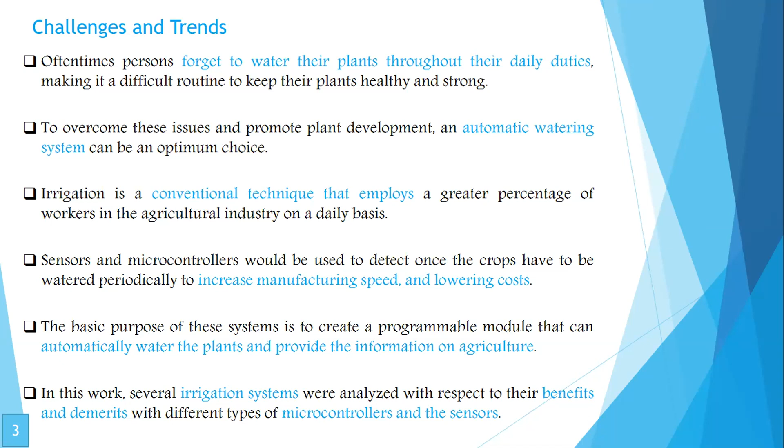The basic purpose of the system is to create a programmable module that can automatically water the plant and provide information on the agriculture or any other environment. In this work, we analyze different kinds of irrigation systems with respect to their benefits and demerits, based on different microcontrollers and sensors that can make the cost higher or the design more complex. That's why I'm going to focus on systems based on Internet of Things.

Often we call it Internet of Everything, a paradigm that invents a worldwide network of interconnected equipment and gadgets. In such a situation, we call it smart gardening based on IoT, or smart farming — the process of remotely serving the status of the farm or garden and automating it. Gardening is a pleasurable hobby that needs attention to keep plants healthy and strong.

Due to the constant changeover in weather and climate, it's impossible to maintain constant observation all day. This makes current real-world mechanisms need to be equipped with brains and processing power in order to develop the plant or system correctly.

The shortage of water is considered a major problem in today's fast-paced world. That's why we thought that a watering automation system based on IoT aims to connect as many devices as possible over the internet. There are many different factors we have to think about when designing a control system that can automate gardens or smart farming.

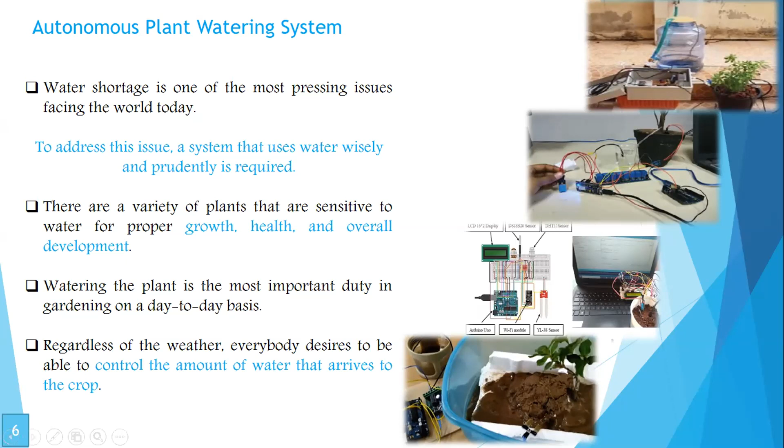Regardless of the weather, we know that everybody would like to be able to control the amount of water that arrives to their plants and crops. Here I'm going to show a summary of the presented works.

Actually, all the works given are using sensors similar to each other: soil moisture sensor, DHT which is temperature and humidity, pH sensor, and so on. However, the differentiation will be in the microcontrollers.

We know that there are different kinds of modern microcontrollers nowadays, like Raspberry Pi and Arduino. However, with Raspberry Pi we can deal with complexity in the coding part, and for Arduino it's a perfect board.

But we have to think about making an integration with other kits, for example with Zigbee or the Ethernet shield, in order to create the Internet of Things and make it effective.

So we think always about Node MCU, which is a kind of Arduino integrated with ESP8266, which already has Wi-Fi integrated, so we can deal with IoT similarly.

However, the biggest problem in such integration is that the number of analog ports is limited. So some authors are making integration with Node MCU and Arduino, which makes the cost and complexity higher.

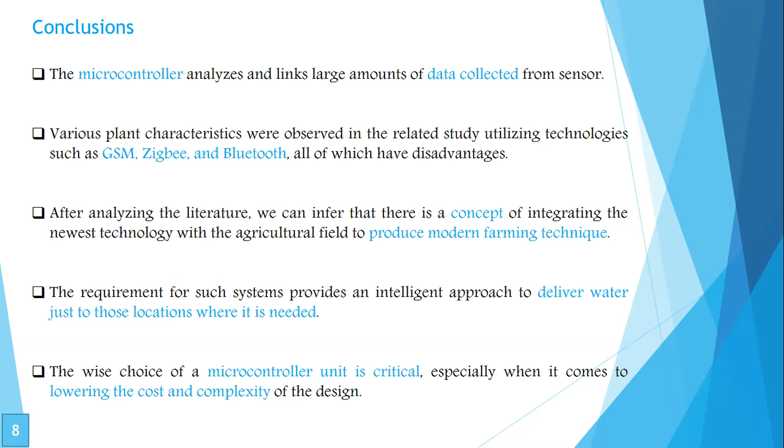As I said, when we choose an Arduino with Node MCU together, we get some complexity and higher cost. So we have to choose the microcontroller in a better way to reduce the complexity and the cost.

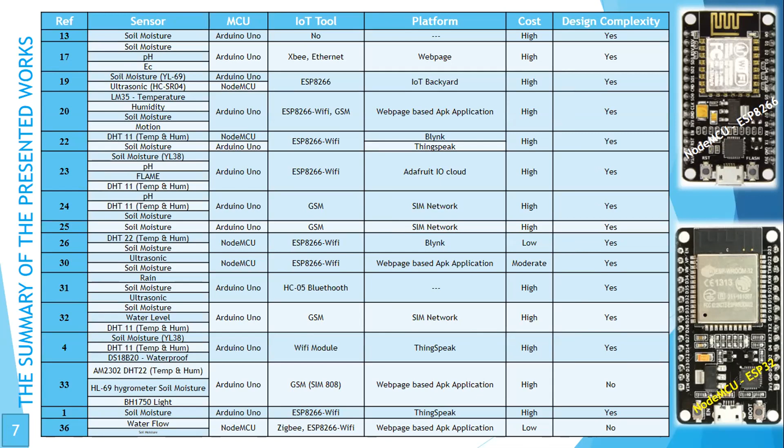Okay, let me share my screen first. Sorry, okay, so can you see my screen, everyone? Yes, okay, thank you.

Okay, Assalamualaikum and very good morning. I think in Turkey it's morning, right? So I'm in Malaysia, we are actually in the afternoon, in the evening. So I'm here today to present this work.

The topic is development of quadrotor control under wind disturbance. I'm Ilya Muhammad Noor. This research is teamwork of myself and my final year project student, Nurul Ain Humaira Hasnul Hadi, and also my research grant team.

Basically, the work here is focusing on UAV, unmanned aerial vehicle, and we are focusing on quadrotor UAV. So what is a quadrotor UAV? Basically, there are two types of UAV, which are fixed wing and vertical takeoff and landing vehicle. So quadrotor is one of the VTOL families, which is vertical takeoff and landing.

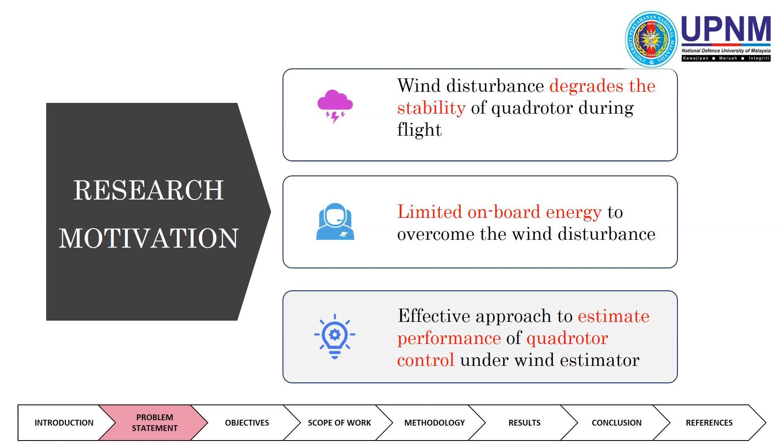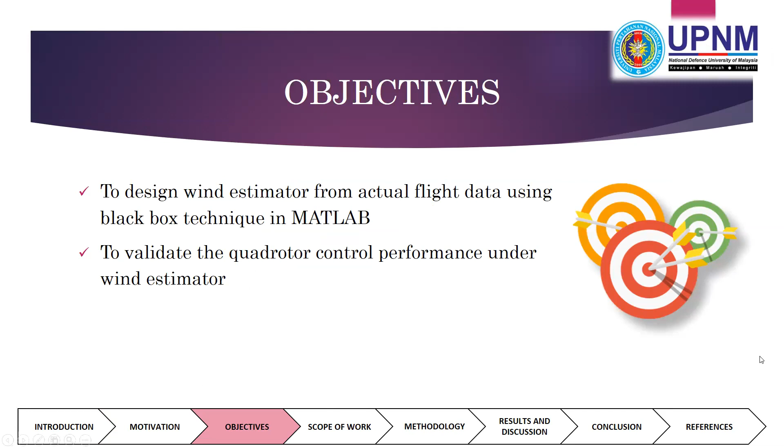In this project, we are using actual flight data obtained from an experimental setup, where we have an actual quadrotor flying, and it experiences turbulence wind that we create from a wind tunnel.

Based on this result, we designed a flight procedure where the flight environment data we collected focuses on two flight environments: moderate wind and strong wind. The quadrotor here is hovering, starting from 0, taking off and hovering at 2 meters above the ground.

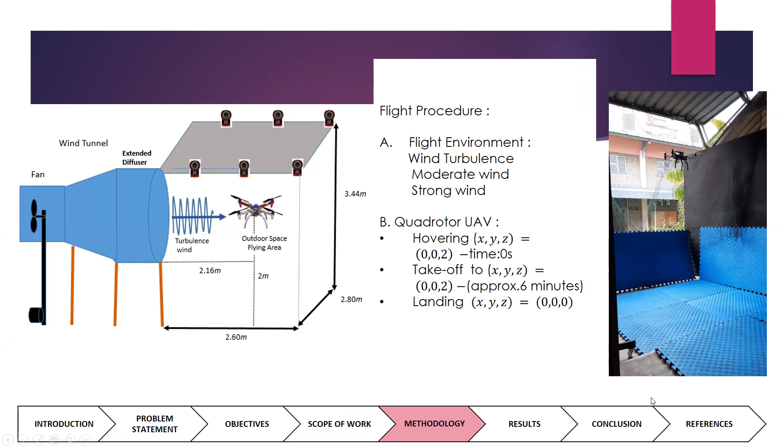Details about this flight data and setup can be found in my paper on the evaluation of quadrotor flight and battery consumption under wind turbulence condition in an open jet wind tunnel, which was published in 2021.

For this work, based on the actual flight data we obtained, we are designing a wind estimator using a black box, which is a transfer function in MATLAB. This is the framework for the development of the wind estimator.

Based on the actual flight data, we follow the normal procedure: data identification and then data processing, and we divide the data into two parts, estimation data and validation data. The estimation data is inserted into the black box toolbox in MATLAB, and then we validate the model by comparing it with the validation data and analyzing the performance.

Let's see the results. This is the result from the actual data. In this presentation, I'm focusing on the results for position Y, where the quadrotor data shows two conditions: moderate wind and strong wind.

The quadrotor's flight under moderate wind is shown in blue, and the flight under strong wind is shown in red. This is position Y. As you can see, during operation under moderate wind, at takeoff the position error is 0.000447, and during landing, the position should be at 0, but it has an error of 0.015.

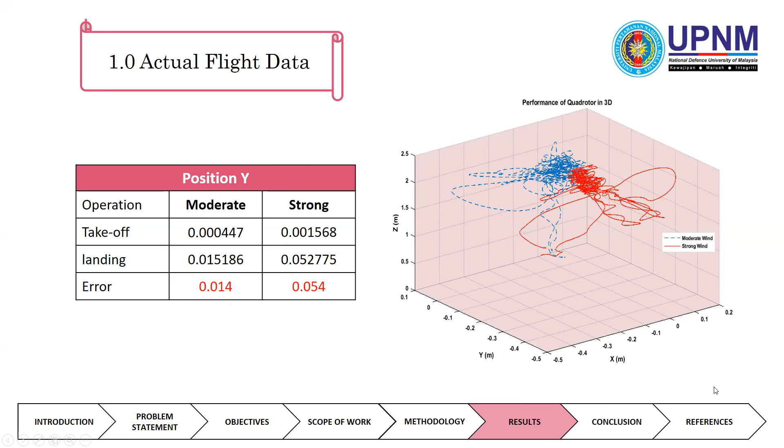This one represents the actual flight data. You can see here the actual flight data from the wind tunnel in terms of three-dimensional X, Y, Z position. So this is what it means here, the position error of 0.014.

We look at it, it's supposed to be the UAV, the quadrotor supposed to be hovering at the desired point, which is 0, but it is shifted an average of 0.014 here due to the moderate wind, and this one is shifted at 0.054 due to the strong wind. So the strong wind experiences higher deviation in position Y compared to the moderate wind.

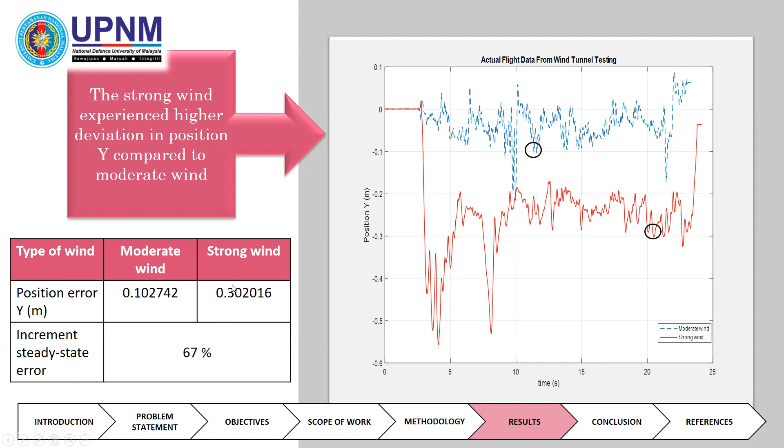So if you can see here, the increment of the steady state error between the moderate wind and the strong wind is 67%. It means that strong wind has 67% higher position error compared to the moderate wind.

So again we look at the actual flight data for position Y with how the control loop performs during this position control. The blue one is the moderate wind, and the second graph is the torque, showing the torque for the moderate wind and also for the strong wind that controls the four rotors of the quadrotor, so that the quadrotor UAV is able to position at the desired position.

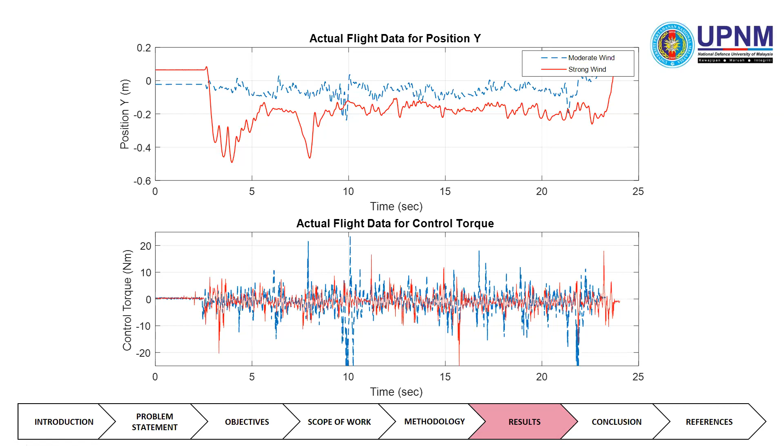This is the simulation for the model. You can see here the model of the quadrotor that we use in MATLAB to study and analyze the performance of our developed wind estimator with the actual flight data. This is the moderate wind and the strong wind transfer functions that we developed in the design stage.

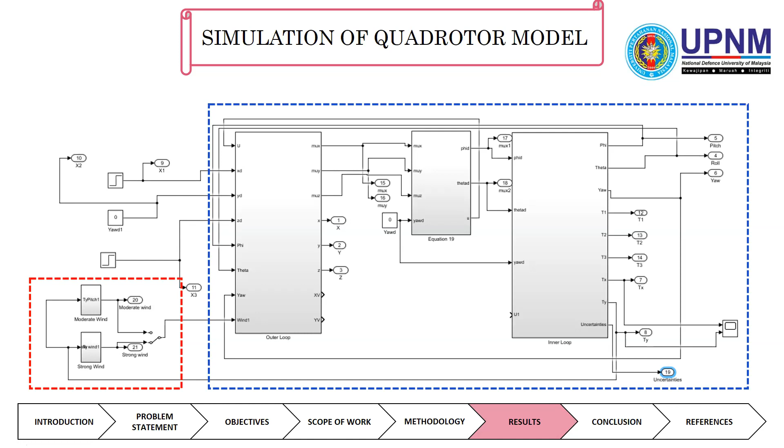Now we go to the simulation of the quadrotor with the wind estimator. If you can see here, this is position Y over time for the simulation. This is the time from 0 to 1000 seconds, so we hardly see anything, but there is actually something around here.

So we zoom it to this range, from 50 to 500 time, and then we zoom in on position Y. You can see that the strong wind gives a higher, larger overshoot using the transfer function of the strong wind, with some flight data input. It shows that the output from the transfer function using strong wind gives the highest overshoot, a large overshoot, and larger steady state error compared to the moderate wind.

From the results, we did a few studies. We performed this analysis using other flight data just to strengthen the results. So in the end, this is what we get.

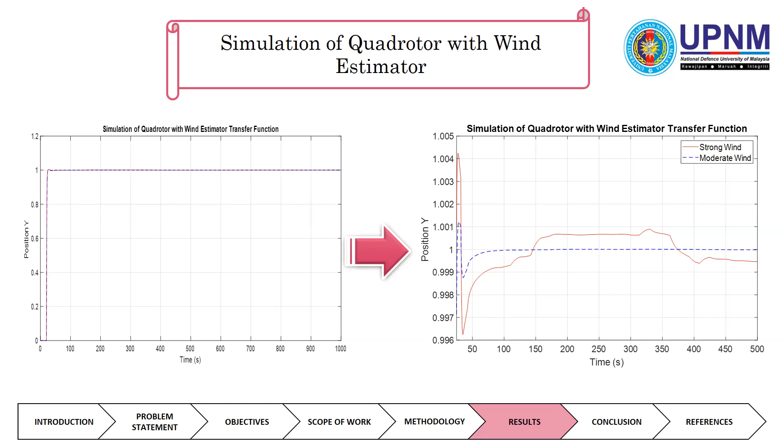From the type of wind, using the actual flight data, as we mentioned previously, we have a 67% increment of position error for the strong wind compared to the moderate wind. It means that when the wind is strong, the position error for the quadrotor UAV experiences 67% higher deviation compared to the moderate wind.

When we did the development of the wind estimator using a transfer function in MATLAB, MATLAB toolbox, using black box techniques, we discovered that we obtained the steady state error for the moderate wind around 0.99, and the strong wind around this value.

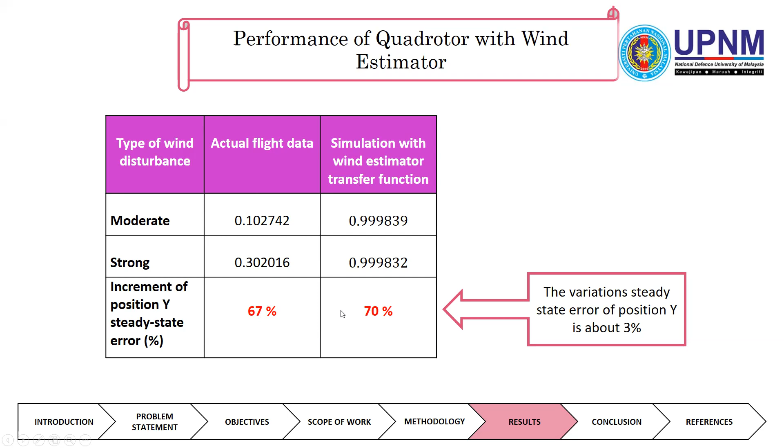And if we compare the relationship between both, we find that strong wind has 70% higher steady state error compared to moderate wind, using the model that we estimated using black box techniques. So we can conclude that the variation of the steady state error of position Y between the actual flight data and...

...the wind estimator that we developed is just about 3%, which we find acceptable. As a conclusion, the development of quadrotor control under wind disturbance can be achieved by simulation of quadrotor using wind estimator. Thank you.

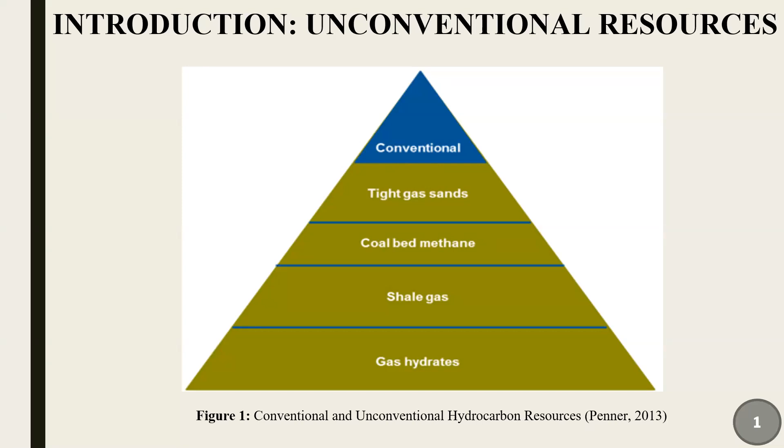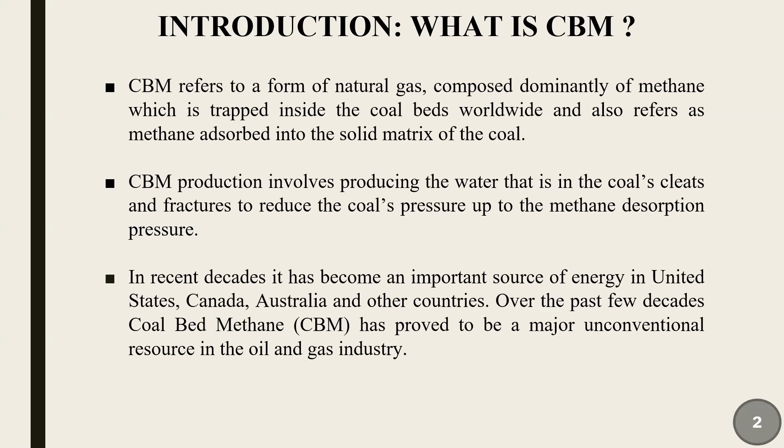What is CBM? Coal bed methane is an unconventional form of natural gas found in coal deposits or coal seams. In recent decades it has become an important contributor to energy production, mostly in countries like the United States and Australia. China is catching up, where the majority of the country's natural gas comes from coal seams. Coal bed methane production involves producing the water in the coal cleats and fractures to reduce the coal pressure down to the methane desorption pressure. This allows desorption of methane gas from the coal micropores and cleat surfaces so it can be produced.

What is enhanced coal bed methane? It is the injection of gas, either carbon dioxide or nitrogen, into the coal seam. This helps produce more methane gas that would otherwise be inaccessible. This unconventional method, which also serves as a method of carbon sequestration, involves injecting liquefied gas like CO2 or nitrogen into the coal, which is preferentially adsorbed by the coal. Because of this preferential adsorption, rather than depressurizing the reservoir to allow methane desorption, methane gas is released as CO2 or nitrogen is injected, acting as a kind of exchange between them. Normally, coal bed methane produces up to about 50% of the available methane from a coal seam, while injection of CO2 or nitrogen gas increases this production to about 90%.

That is to say, for example, if you have a Coca-Cola bottle with liquid inside, and you shake it and open it, it rushes out, and with time the pressure declines. But let's use Mentos as our gas, either CO2 or nitrogen, and throw it in there - the pressure will increase, and it will sweep out the remaining Coke, the remaining liquid in the bottle. So that is to say, it increases the production.

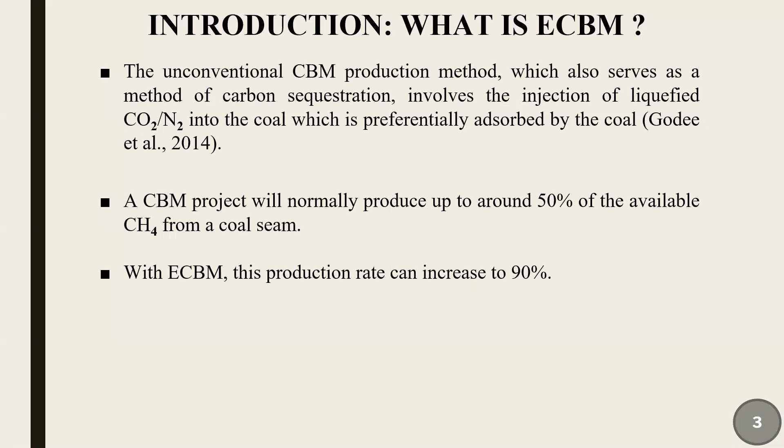So, carbon sequestration: carbon sequestration secures carbon dioxide to prevent it from entering the earth's atmosphere. Although carbon sequestration can occur naturally, this process is slow, and geological sequestration is needed to effectively reduce carbon footprint. Using carbon dioxide as an injection gas is apparently a win-win situation, as more methane gas can be produced while CO2 is stored underground.

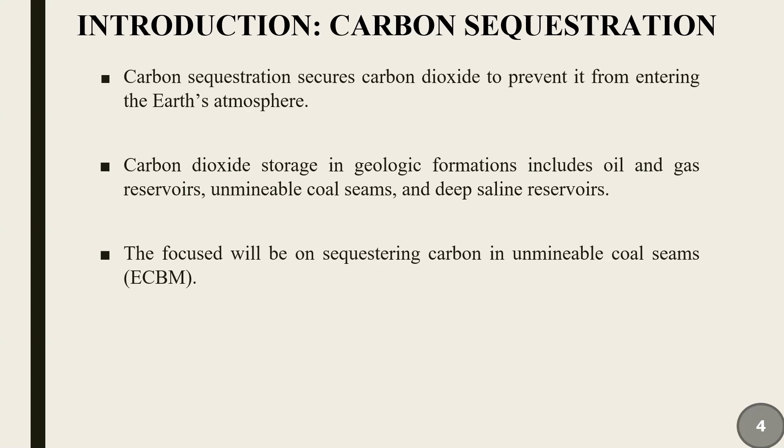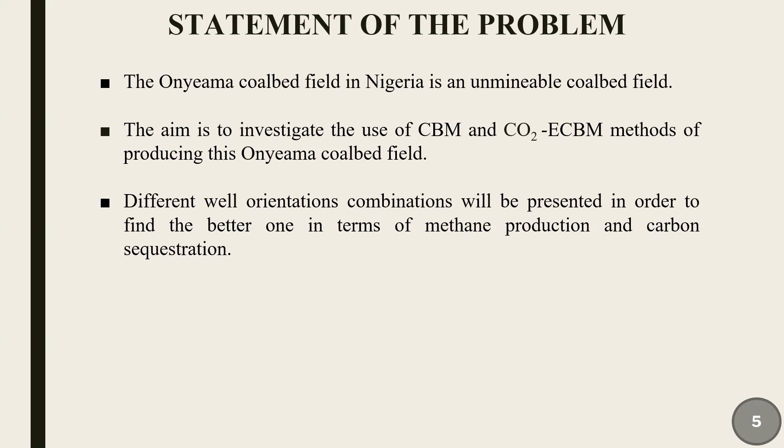Statement of our problem: the Onyeama coalbed field in Enugu, Nigeria, is an unmineable coal field. We use this as our case study to investigate the use of coal bed methane and CO2 enhanced coal bed methane methods of production in this field. Different well orientations were presented to find which performs best in terms of carbon sequestration and methane production.

Methodology of this Onyeama coal bed field: the Onyeama coal bed field in Enugu is unminable coal, as I said. The characteristics of the field will be shown in the next slide.

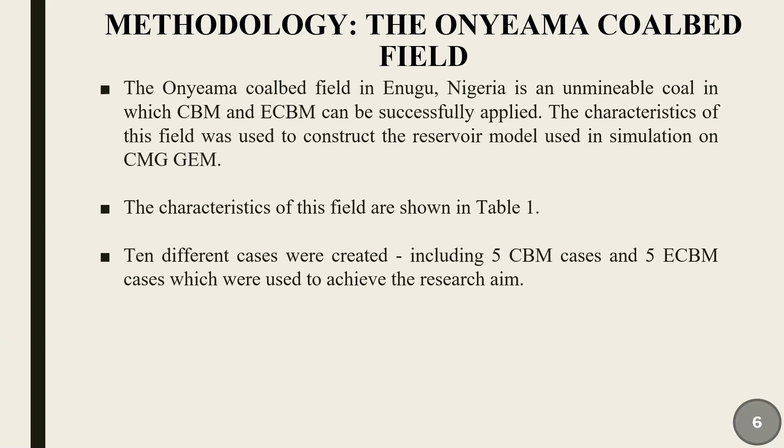10 different cases were used to create this model on CMG GEM, which include 5 coal bed methane and 5 enhanced coal bed methane cases. The created models were then run on CMG GEM for 10 to 15 years, starting from the 1st of January 2020 for production and injection until reaching economic limit.

After the economic limit was reached, injection was continued for enhanced coal bed methane cases for 10 more years. Other than the first case, which was run for 15 years, all other coal bed methane cases were run for 10 years before reaching their economic limit, at which point production was stopped.

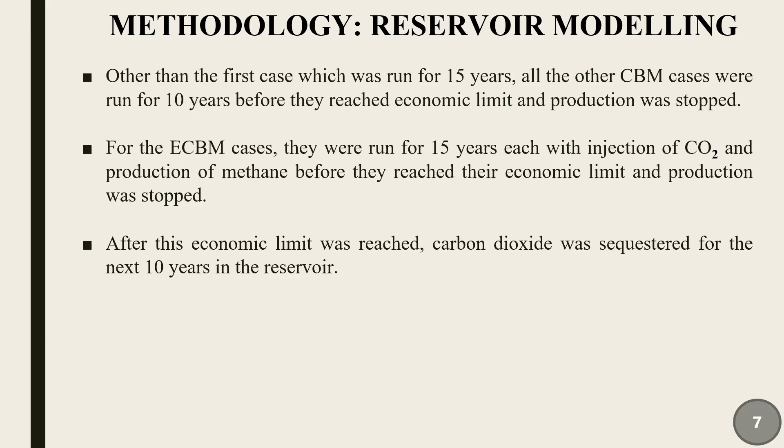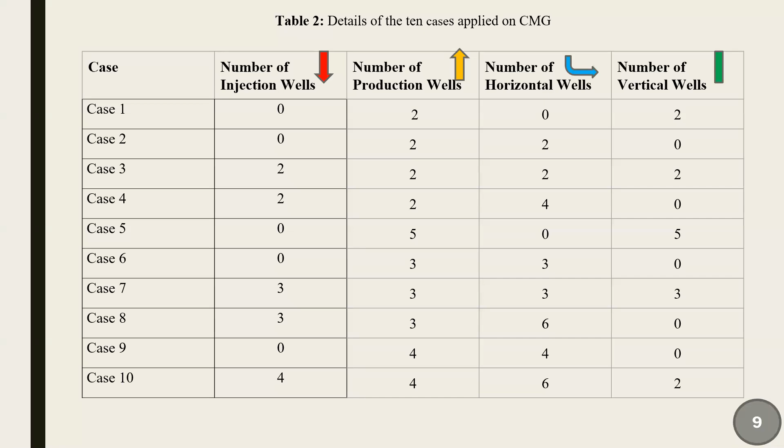Case 6: 3 horizontal producers. Case 7: 3 horizontal producers and 3 vertical injectors. Case 8: 3 horizontal producers and 3 horizontal injectors. Case 9: 4 horizontal producers. Case 10: 2 vertical injectors, 2 horizontal injectors, and 4 horizontal producers. So these are the details of the 10 cases applied on CMG GEM.

The results of coal bed methane recovery operations are dependent on the adsorption and desorption of methane. This desorption and adsorption of methane to coal is determined by the Langmuir isotherm, in which the amount of gas at pressure equals the Langmuir volume parameter over the Langmuir pressure parameter plus pressure.

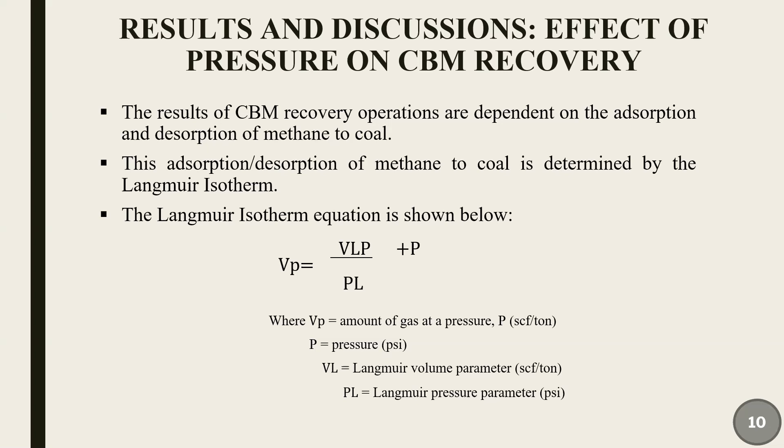So to investigate this scenario, three cases were considered. Case 3 was subjected to 3 different conditions: high pressure at 2000 psi, medium pressure at 800 psi, and 36.26 psi as low pressure.

It is important to note that case 3 was originally investigated at low pressure, that is 36.26 psi. The pressure conditions were set in the reservoir by setting the constraint of the producers to have minimum pressure equal to the desired pressure condition.

Running these simulations revealed that the relationship between pressure and volume of adsorbed gas is directly proportional. That is, at lower pressure, there is a low amount of gas adsorbed to the coal, and vice versa. This is in agreement with the Langmuir isotherm equation.

This means that the lower the pressure in the coal bed methane reservoir, the more methane can be desorbed from the coal and produced. At higher pressure, however, there is a high limitation on the amount of methane that can be desorbed from the coal.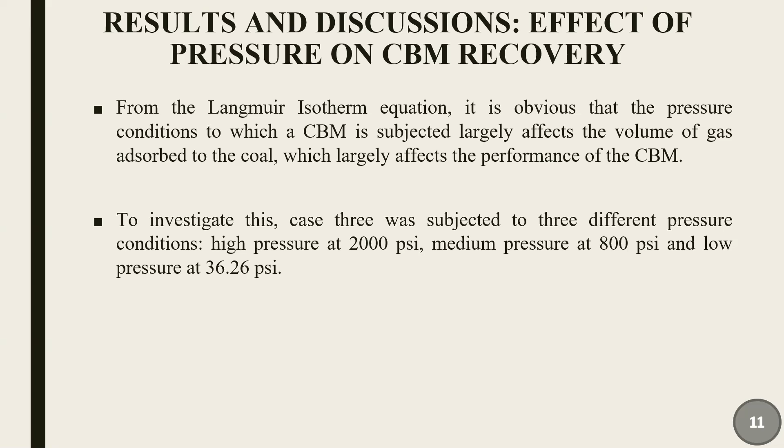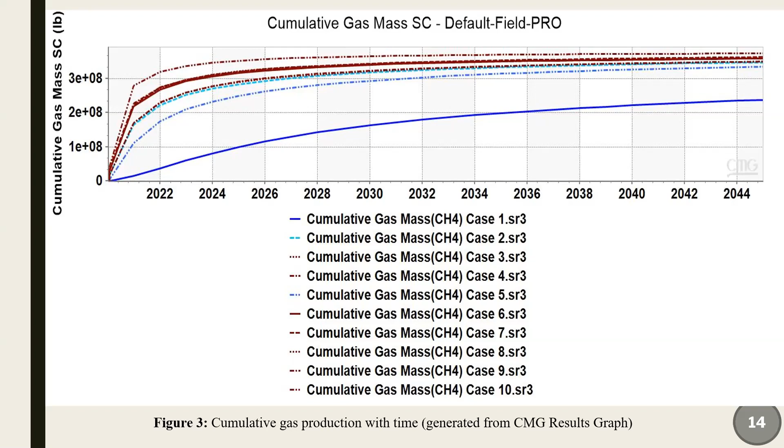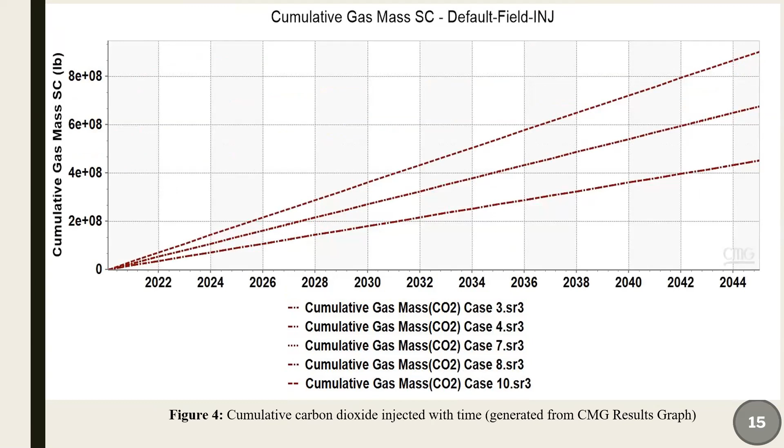This is the cumulative gas production with time for all 10 cases. This is the graph generated from CMG, and this is the cumulative carbon dioxide injected with time, also generated from our CMG graph.

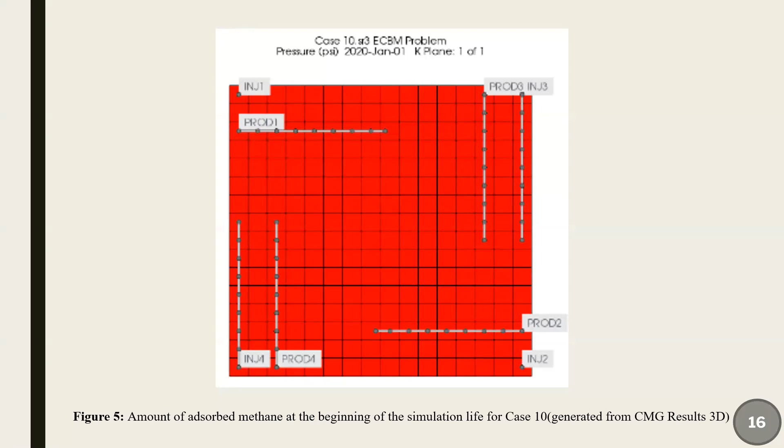So this shows the amount of adsorbed methane at the beginning of the life of case 10. As we ran our simulation, case 10 performed better in terms of methane recovery and CO2 sequestration.

So this table shows us the best cases, in which case 10 comes first with a 95.2% recovery factor and 8.68 cumulative methane recovery, and then case 7 comes second, followed by case 8, and so on.

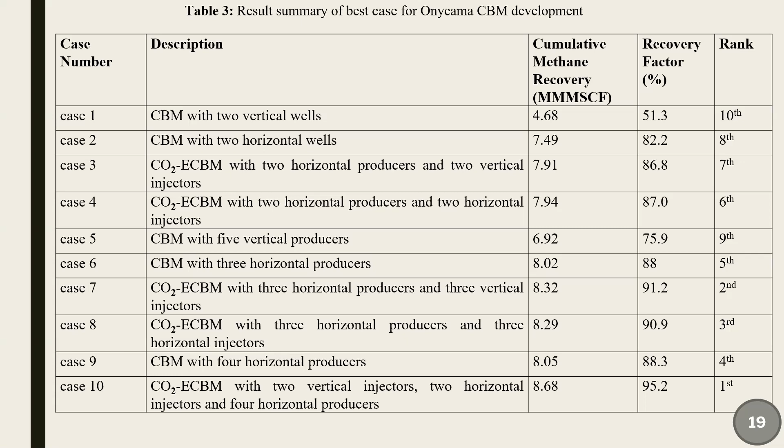So in conclusion, in the choice between conventional coal bed methane and CO2-enhanced coal bed methane for producing from unminable coal bed reservoirs, it was seen that CO2-enhanced coal bed methane generally performs better in terms of gas production, with the best case for conventional CBM producing less gas than the best case of CO2-enhanced CBM.

It was seen that a large amount of CO2 could be sequestered into the Onyeama coal bed field in Enugu, Nigeria, without reaching the reservoir fracture pressure. This shows the potential use of CBM in Nigeria as a method of carbon sequestration and storage to make up for the large volume of flare gas.

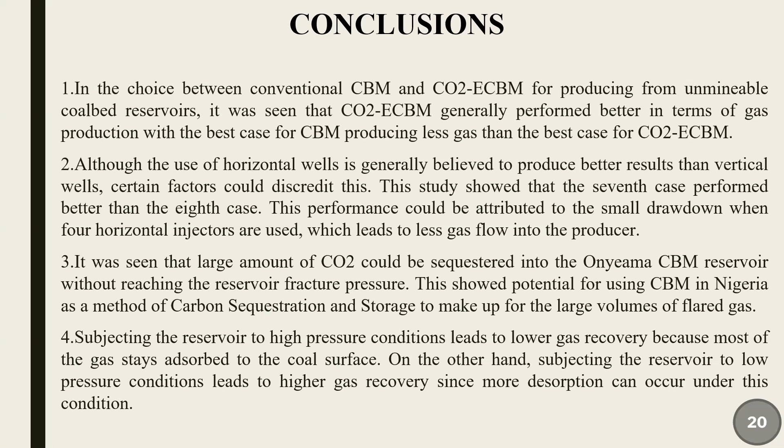Subjecting the reservoir to high pressure conditions leads to low gas recovery because most of the gas stays adsorbed to the coal surface. On the other hand, subjecting the reservoir to low pressure conditions leads to higher gas recovery, since desorption can occur more readily under these conditions. So, thank you.